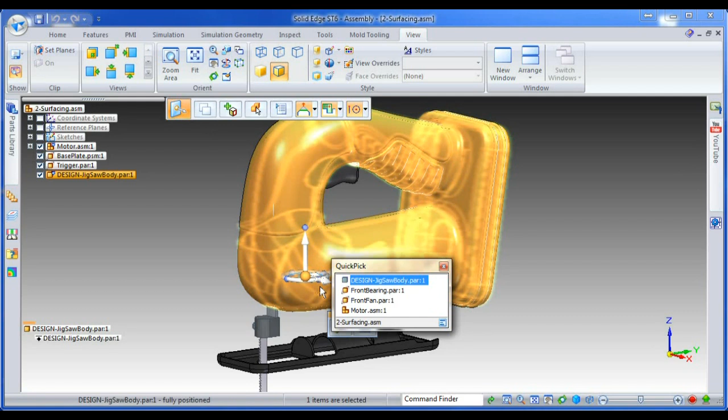So we just want to do some surfacing. I'll open up a jigsaw. This needs a few more features, so I'll come in and edit the body, and I'll just hide the remaining parts with Control Q, and we'll come into the surfacing.

I need to create a new overmold of this grip here. So I've just offset that surface, and now I'll hide the rest of the design body and show my swoosh sketch. We'll call this a swoosh.

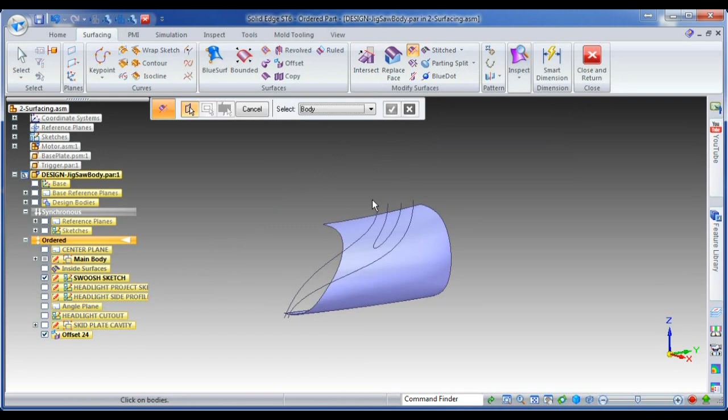I want to use the new ST6 trim command to trim this surface with these edges. Notice in ST6 I don't need to either project the edge or do it in multiple steps. I can just do it very quickly and easy.

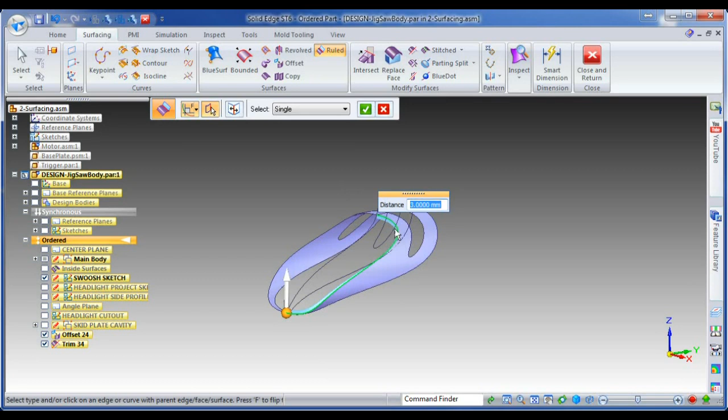Now I've also got a new reflective plane command, which just allows you to visualize as though it was completed. And I'm also going to use the new ruled surface command, which basically just adds edges, and it can be a number of different edge conditions onto my body.

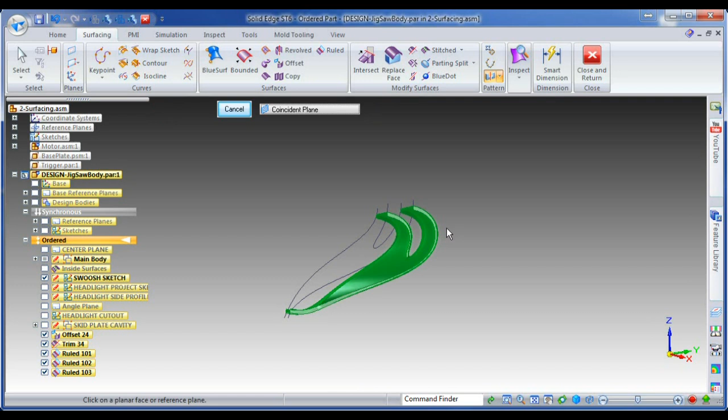So now I want to actually mirror it. I'm just going to grab all of those bodies, mirror them over the center plane that I've just got over here, and then I'm going to stitch these bodies together, these individual surfaces together.

After I've stitched them together I can then just simply apply a round. So I'll grab the round command and we'll apply a round onto each of the edges. Hang on, I've got to select the chain. And there we go, I've applied a 2mm round.

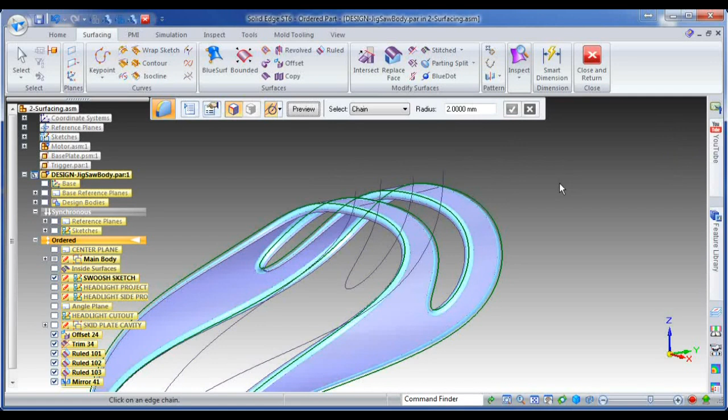Now we want to see the rest of the body that we're going to add this onto. I'll just switch that back on now, and now we'll just union the new surface onto the existing body, that one and that one.

Oh, hang on, let me just double check. I just want to show you, yes, I've done the stitch as well. I just couldn't remember whether I'd done that, sorry. So we'll now union onto this body the new surface.

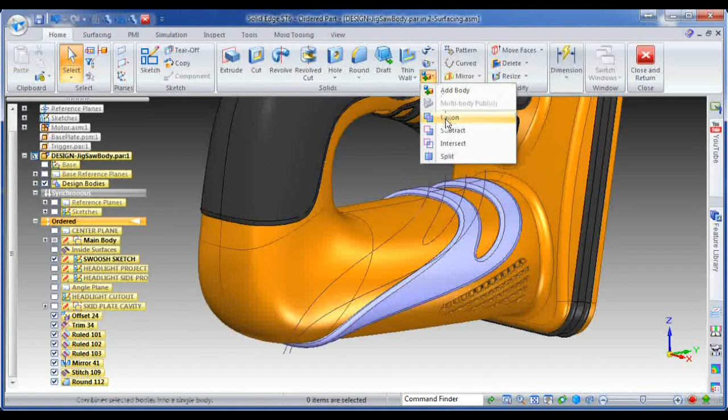Okay, so that's, as soon as it comes up, there we go. That's now added that on, and I might want to make it actually look like rubber, so I'll just paint the new feature with our black rubber.

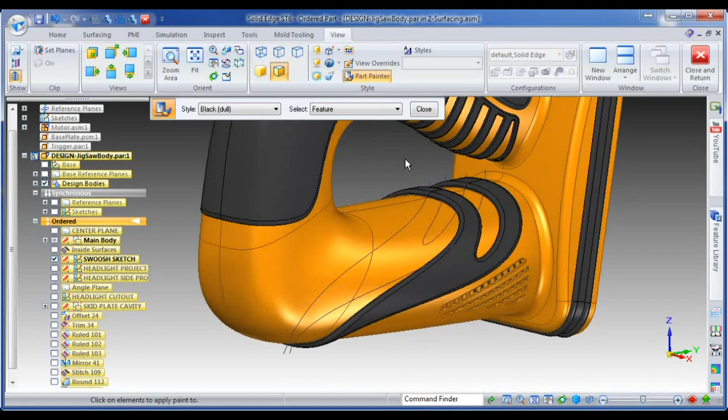So that's the first option. Next, we just want to go and add a new headlight into that area up the top. So I'll switch on my headlight sketches and an angled plane, and I'm just going to come in and create an offset of the outside surface.

I'll just do that by 1mm, and I'll also grab a copy of the inside surface just because I want to do some trimming and stitching to the inside surface as well.

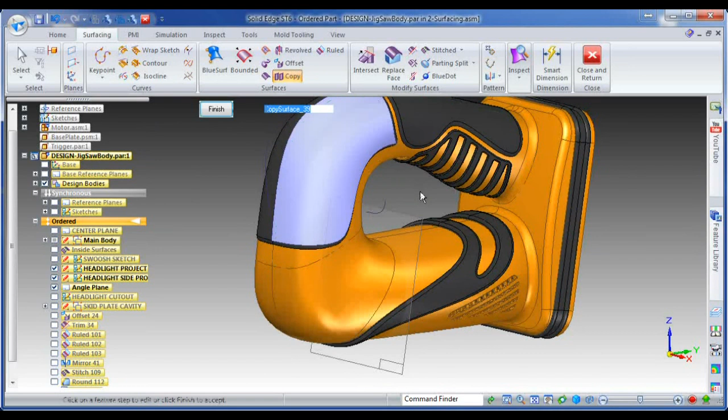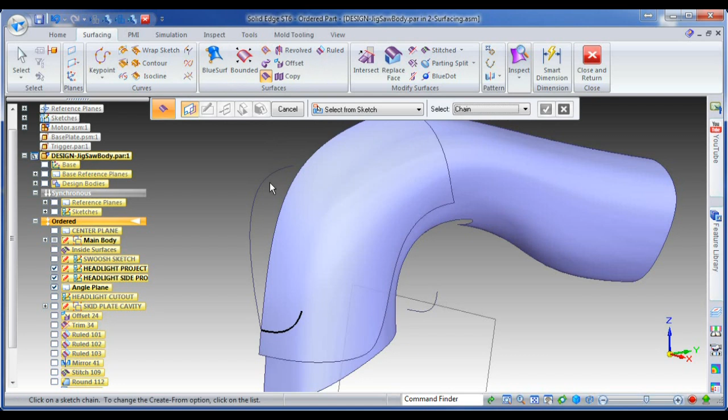Hide the body, and now we'll use the old project command to project this bottom edge onto the front face in that direction. And now we'll use the extruded surface command just simply to create a strip surface to control tangency. We'll need this later on.

Now I'll do a key point curve from the top edge. I'll come out a little bit and then come all the way down to the bottom. And the beauty with the new ST6 key point curve is I've got end condition control.

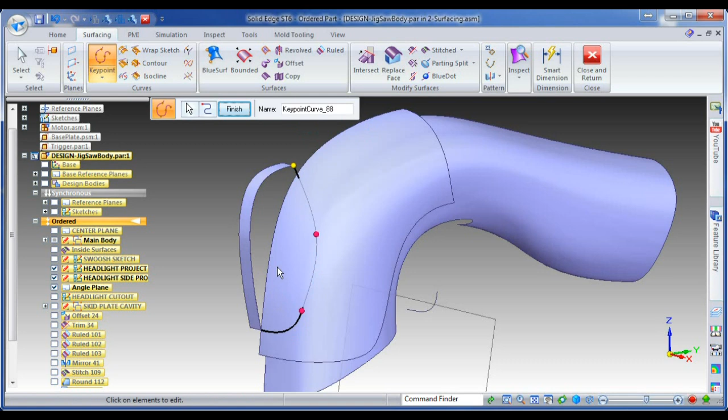So I'll just make that tangent continuous, and you can see I can just grab the handle and drag it out to graphically control those points.

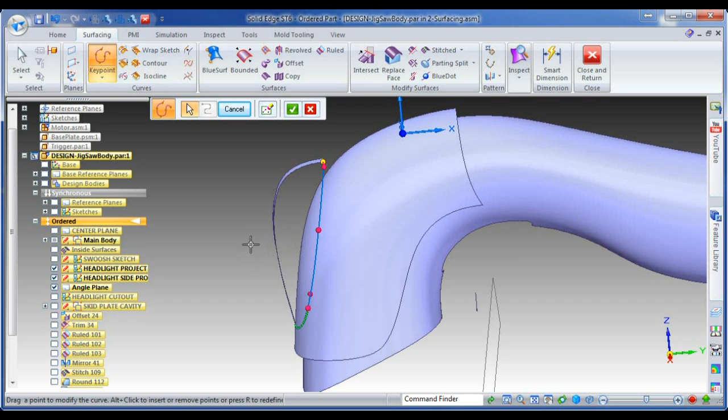Now, as you can see, it's not quite in the right orientational position, the middle point. So I'll just drag that, and in ST6 it will always move parallel to the screen. So the way it looks on the screen is the direction it's moving. It just gives you better control over it.

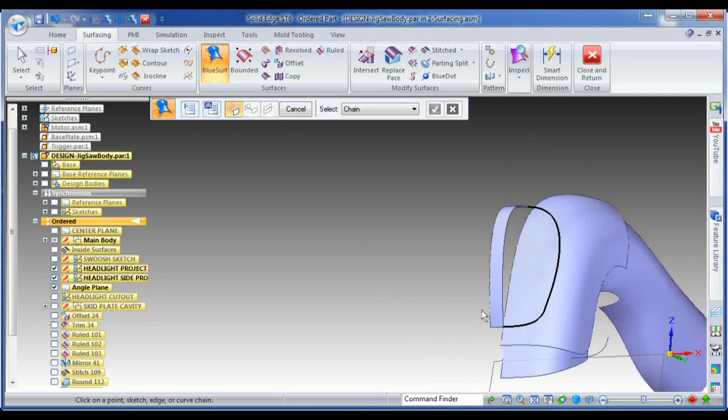So I've now finished that key point curve. I'll create a blue surf from that new curve, those two, through to the previous curve, except as you can see it's not exactly the way I want it, so I'll just set the edge condition to be

tangent continuous. Now that's a lot closer, however I might want to define my curvature in a little bit more detail. So I'll just put a new sketch in there, and you'll see it's added the sketch just above the blue surf in the Pathfinder.

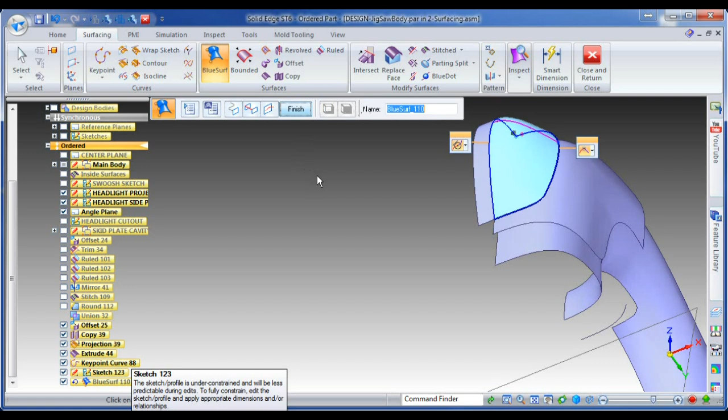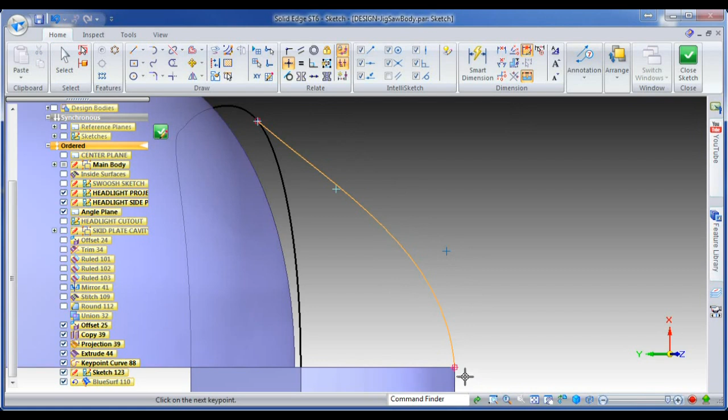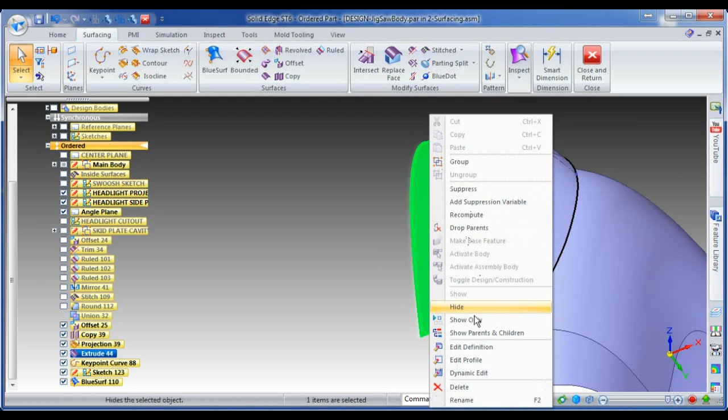So I'll hide the extruded surface, we don't need that anymore, and we don't need the key points and sketches either. Now I'll just turn on the reflective plane to get a better idea what it's going to look like.

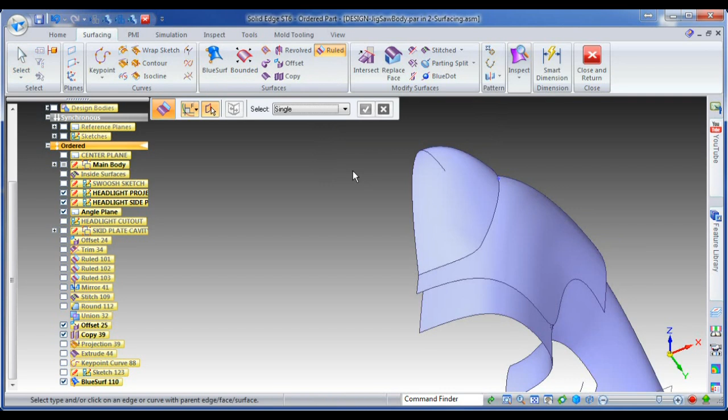That's alright. I'll create a ruled surface just on the bottom edge, except I'll do it with a slightly different option this time. I won't do it normal to face, I'll do it tapered to this plane I've got here. You can see I just set my direction, I can change whether I'm tapering in or out, and the angle. I'll just go down 21mm to make sure I intersect the inner surface.

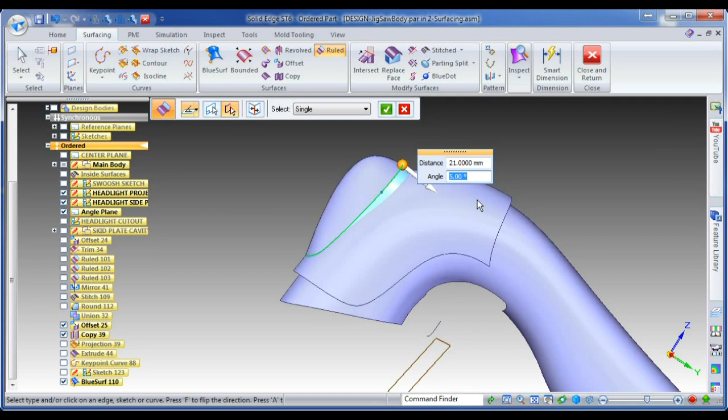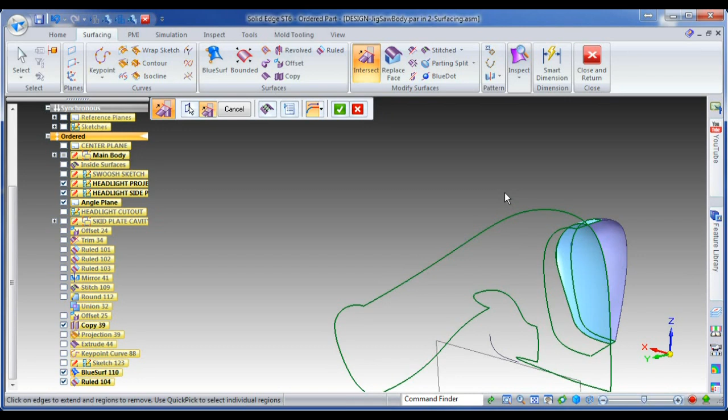Now, the new ST6 command for intersect allows us to do both trimming and intersecting in one hit. I select the surfaces I want to intersect, then I select the areas that I want to remove from that intersection, and it just makes it very quick to work with surfaces like this.

Then I'm just going to mirror these surfaces about the center plane, and then I'll stitch them together to form a body.

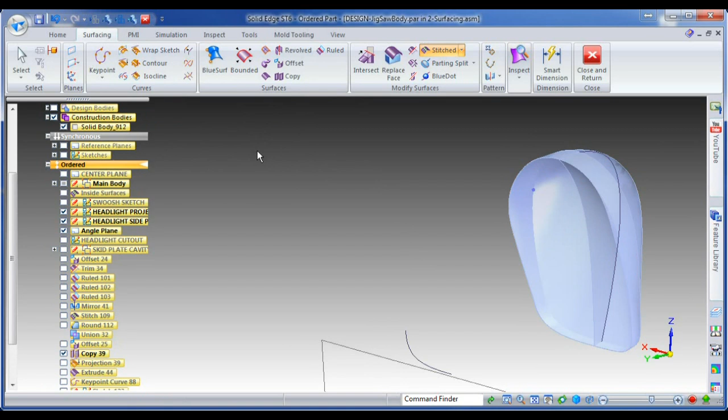Now it's a solid body. It will initially be a construction solid body, and you can see that just in the top of the tree there. Now what I'm going to do is turn off the sketches, and then bring back the rest of the main body.

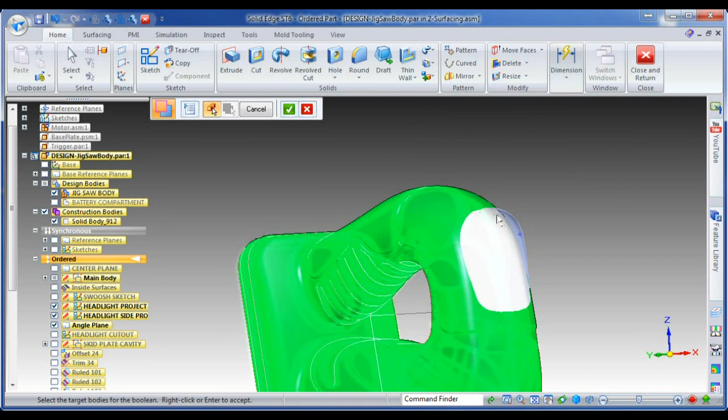I can just toggle them on and off, and I'll just remove, using a Boolean command, that new headlight shape from the previous body. There we go, so I've just cut that out.

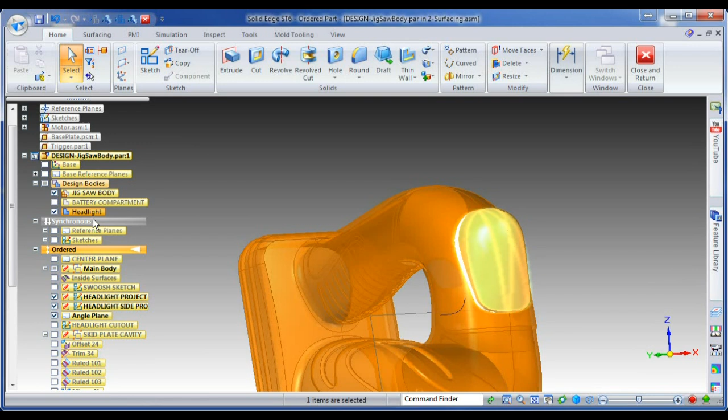Now I want to actually go back in and do a little bit more editing on that body, but before I do, I'll just toggle it to design and give it the name Headlight, for example. Okay, turn off the other body, and I'll continue working.

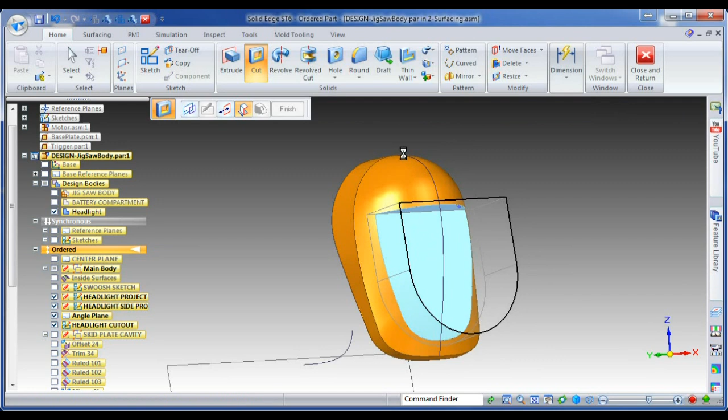Now what I want to do is take a cut from the front face, and I'll use this existing sketch, cutting by a finite amount down into the body. There we go, it looks about right. Turn off that sketch, I don't need it anymore.

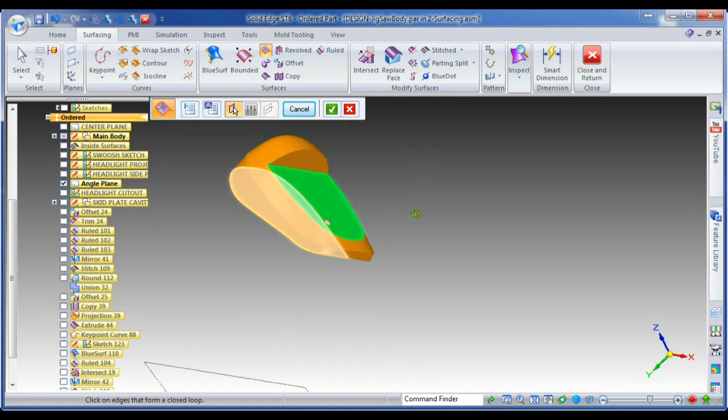Now with ST6 you also have a new command called the redefine command. It's in surfacing, and it allows you to redefine any surface and add or change the curvature and all of those kind of things. It's quite a nice command.

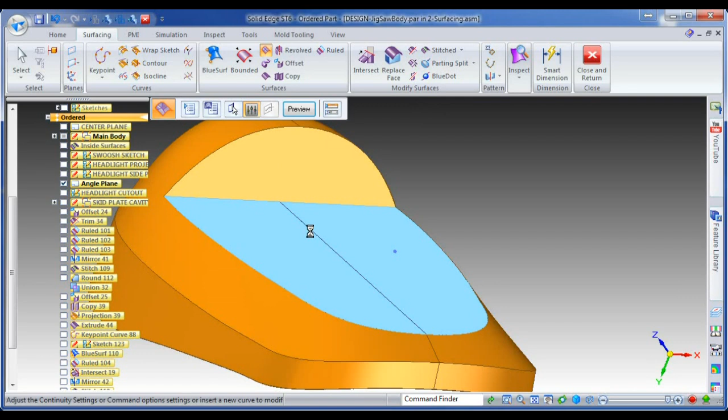So I'll just preview, and then I'll insert a sketch, and I'm going to use this sketch. I'll put it in at halfway along that line, and I'm going to use this sketch to just create this as sort of a lens shape.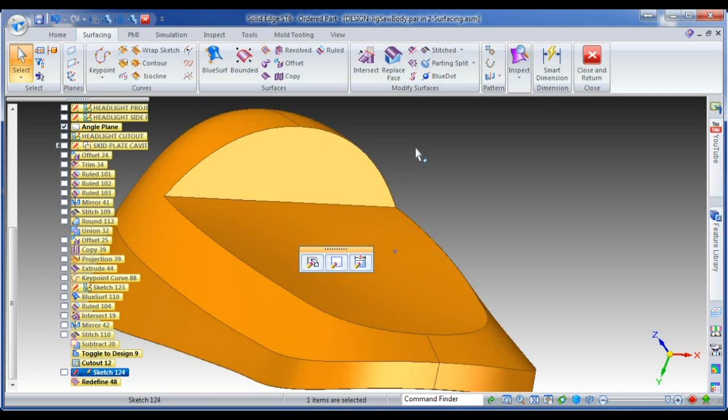I'll just grab that handle, very similar to the BlueSurf handles, and preview that - you can see it's now dished that surface to create sort of a lens shape. So quite a very, very powerful command, and that's brand new to ST6.

Now I'll create a thin wall of this body. I'll just remove the back face using Quick Pick, and it's the same thickness as the main body.

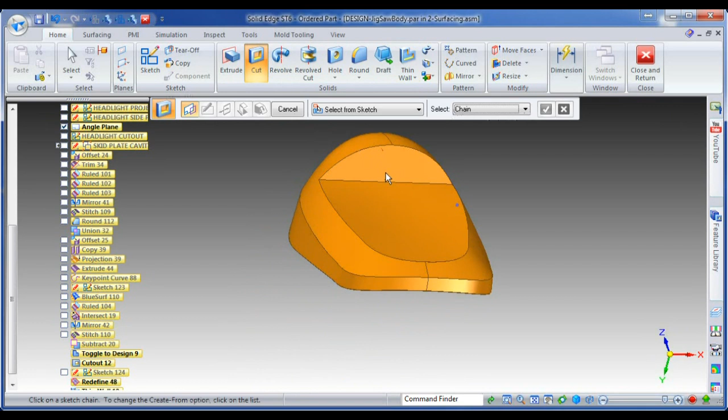Then I'll just take a cut to let the light go somewhere. Now you'll notice if I key in these dimensions, then it adds the dimension into the drawing.

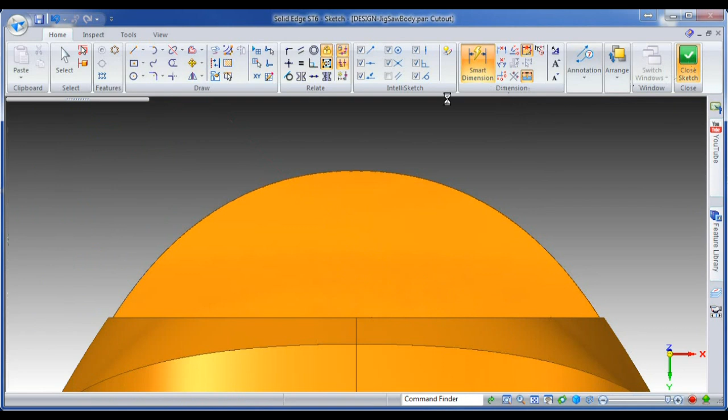So I'm just going to cut through all to make a spot for the light hole. Alright, so that's looking reasonable for the headlight at the moment.

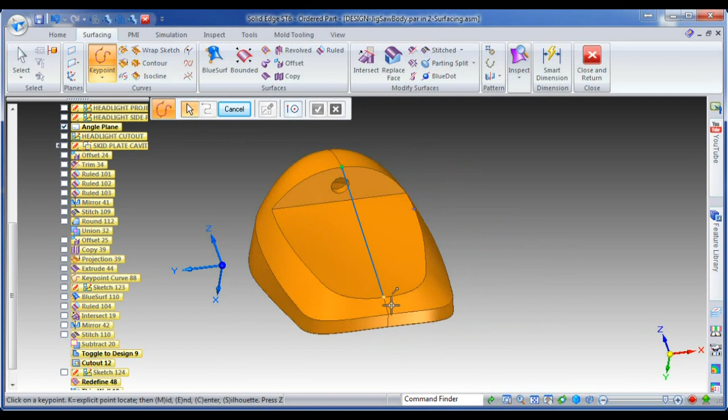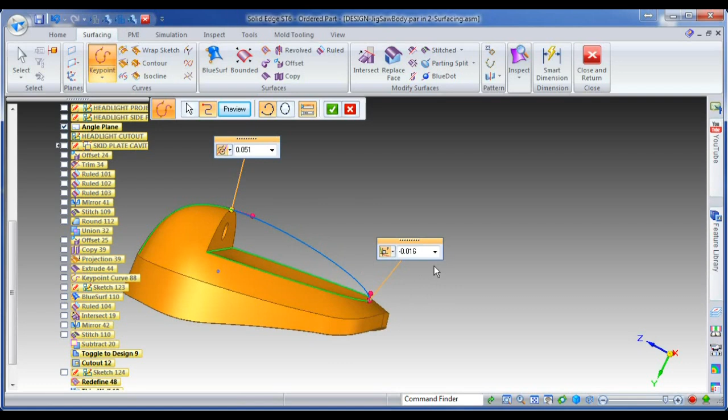Now I also want a lens, and I want the lens to come from that point down to this point. I can use a keypoint curve with only 2 points, and then I'm going to use some of my curvature controls. I'll make this end one normal to face, except I'll bring the extent down quite a bit.

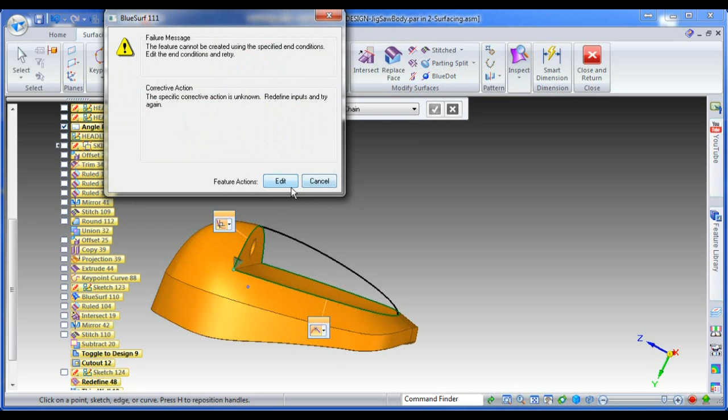Now I can use a BlueSurf, from the bottom edge all the way up to the top edge. It obviously doesn't follow that curve yet, so I'll show you some of the options. Normal to curve won't work, it's just not relevant to this shape. Parallel to curve is not right for this either.

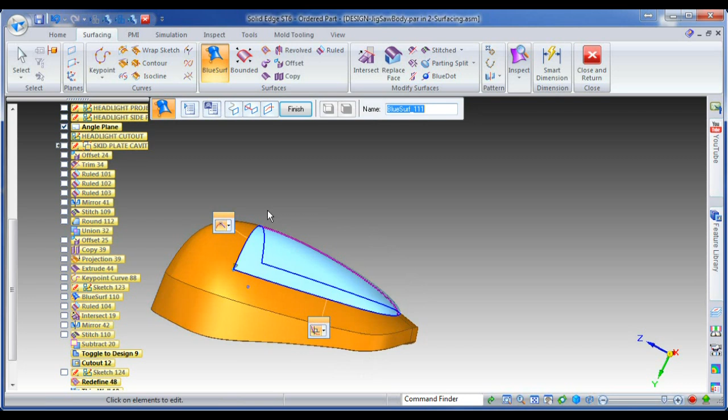However, I want to insert a guide curve, and that is another way of achieving a very high level of control. I can set the bottom one normal as well. So just a few options there for creating your surfaces.

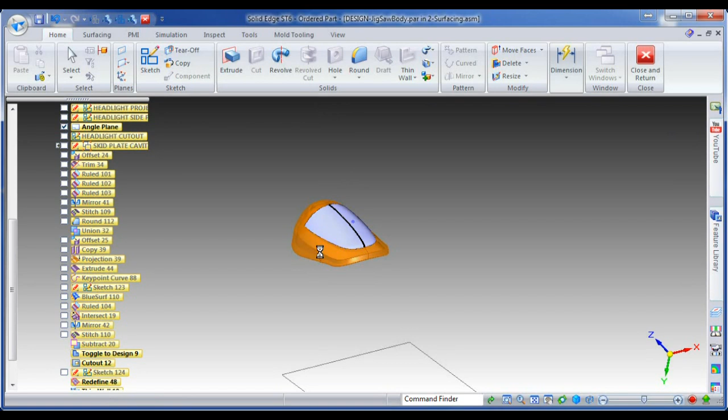Alright, so now what we want to do is add another body called the lens, because at the moment that top surface is only a surface, and I want to thicken that by 0.5 millimeter down into it. Then I want to change how it looks so that it looks more like glass or something similar.

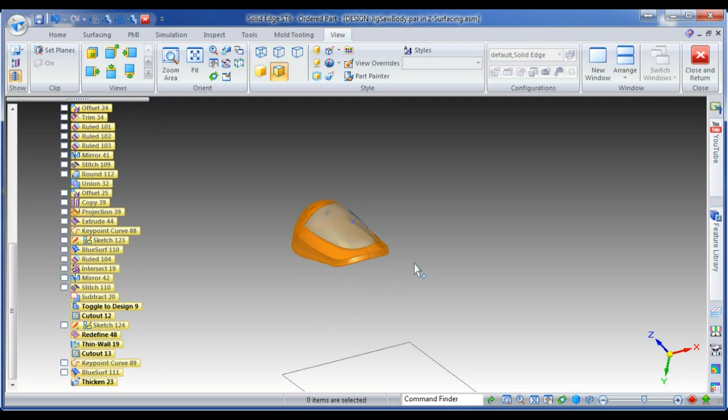I'll just change that to the body, so now that lens is a glass body. I'll turn off the key point curve. I'll turn the main design body back on, and now I'll boolean the headlight into the rest of the design body.

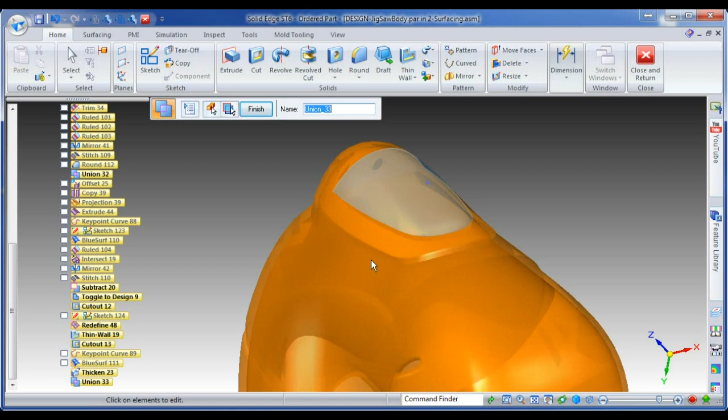And then we might want to add a little bit more curvature, for example. I'll reactivate the jigsaw body, which I can do by double clicking, and we'll add a couple of rounds. We'll add a nice small round on that part, and then a large round, maybe a 10mm round on the bottom edge.

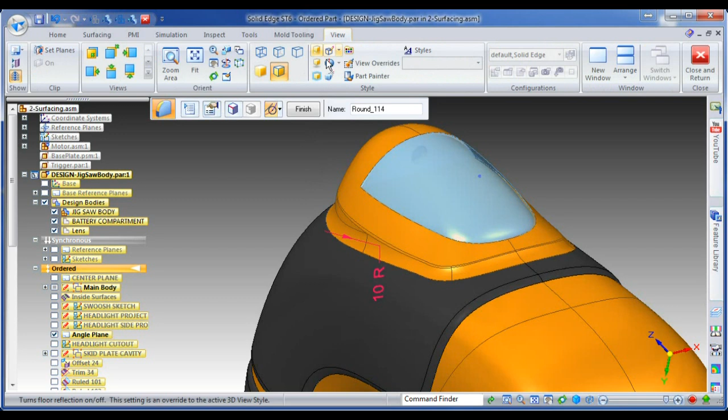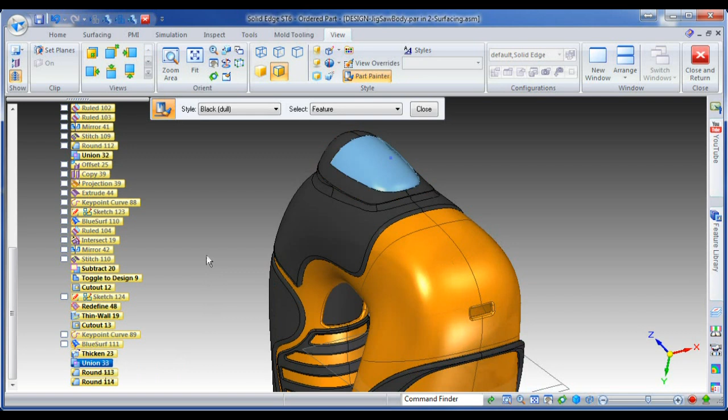And lastly, we'll use the part painter again, because we want these to be overmolded as well, and we'll set that back to the black dull. Now I can part paint directly on the model or from the features in the tree, so long as I select feature and just select the last 3 features there.

So you can see very quickly that the surfacing commands are much more keyed up for fast aesthetic design.

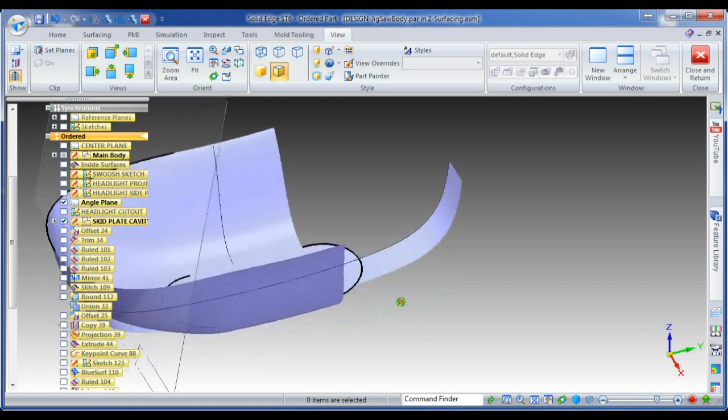Now there's one more part that I want to do, and that is the skid plate cavity. We've got a partially existing surface there already, and I just want to add again a 2-point key point curve and change the end conditions. I want that one curvature continuous, and this one tangent.

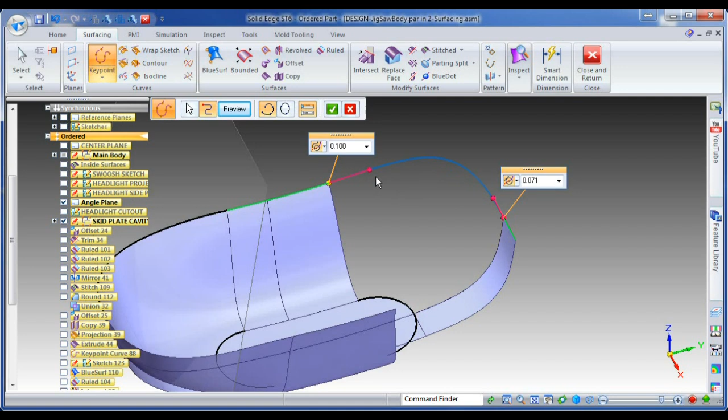Just change the direction of the tangency. And you can have quite a lot of shape control.

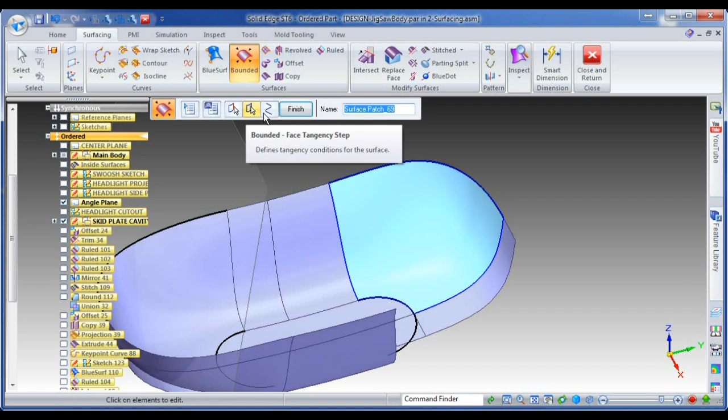Right, now the new bounded surface command has a few options. I can have it set to automatically close the boundary, and I've also got the options for tangency on the faces. So I'll set that to tangency continuous, and there we go.

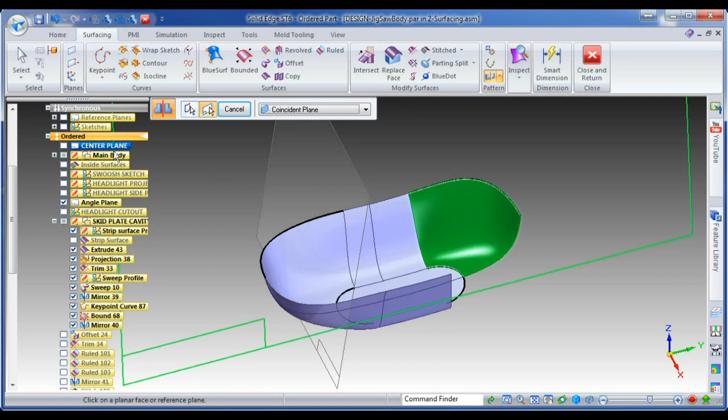Now I'll hide this strip surface, we don't need that anymore. Mirror it over, and then we'll have to stitch it all together. I'll mirror it using that same center plane and stitch it all together.

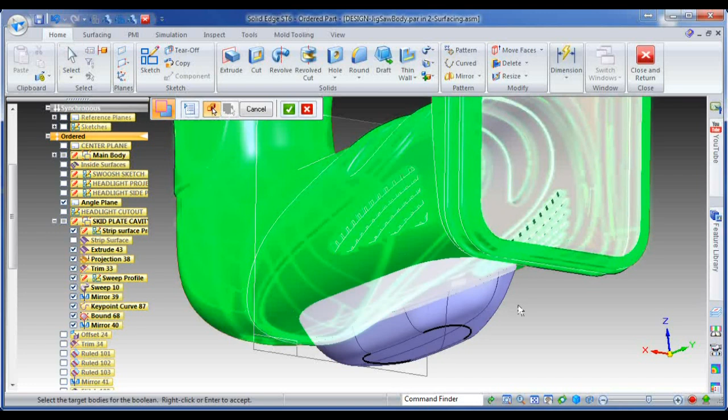And there we go, I can now use this. I'll turn the main body back on. And what I'll do first of all is boolean this existing body with the new body.

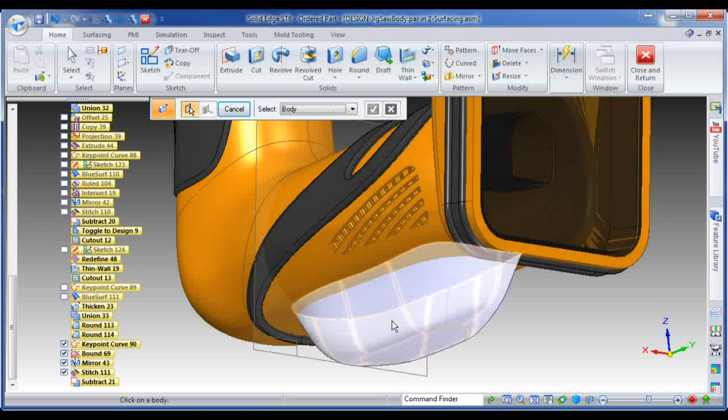I'll just remove the material on the inside there. And then what I'll do is thicken that surface back into the body. So I'll show that surface and thicken it back into the main body, just 2mm thick, same as the rest of it.

And I could just apply a round, however we've got better features than that, so I'll show you another option. We've got various round controls there, but we've also got the option of a surface blend. I just select one, then the other. This will be a tangency continuous 5mm blend around there.

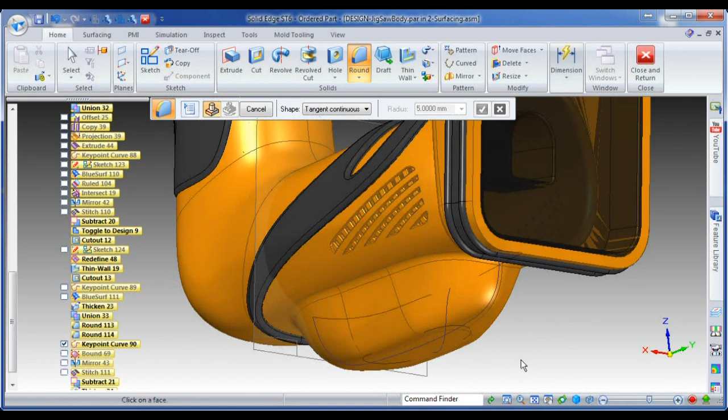So that's a quick look at some of the new surfacing features in ST6. I'll bring back the rest of the model so you can see how it all fits and looks in the end, much more aesthetic.